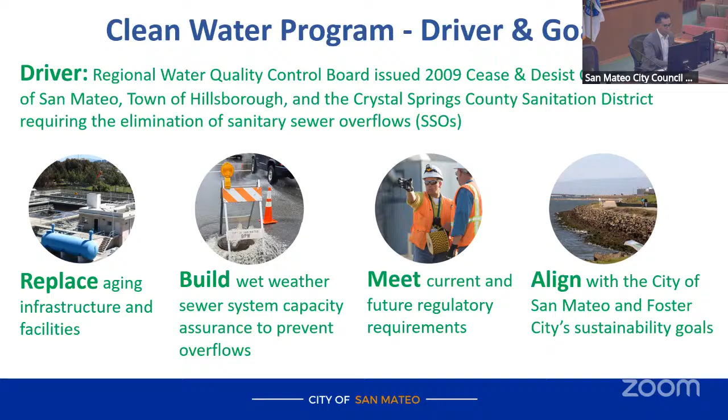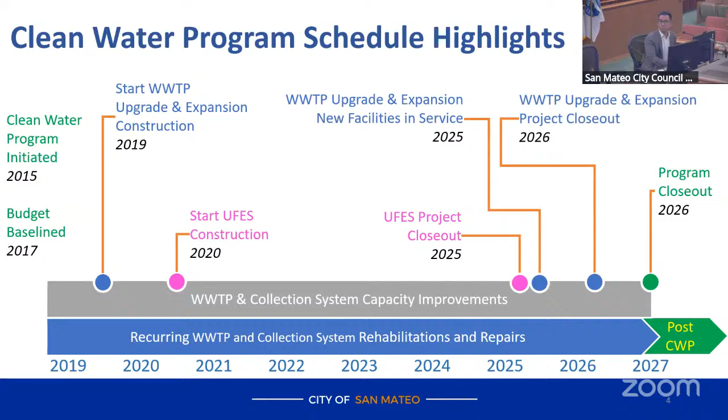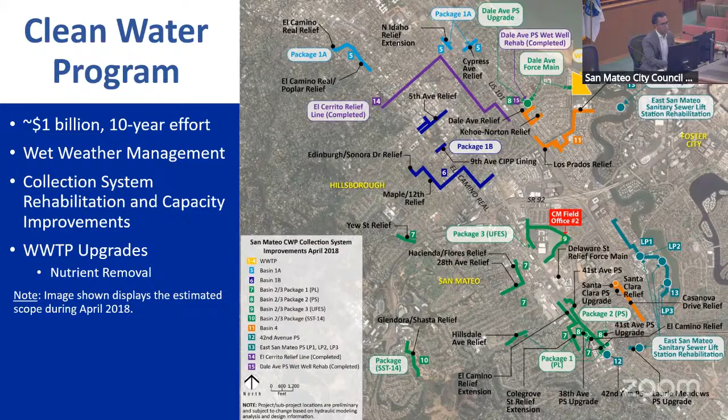The image to the right displays what the scope of the Clean Water Program was back in 2018. It displays various pipeline projects, pump station projects, and even our treatment plant projects shown there in the top right in yellow.

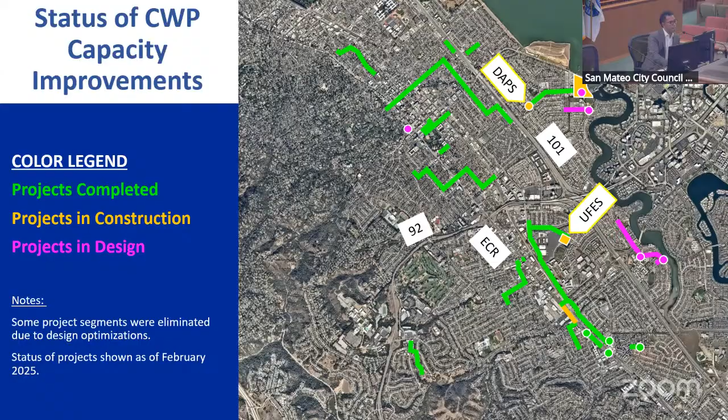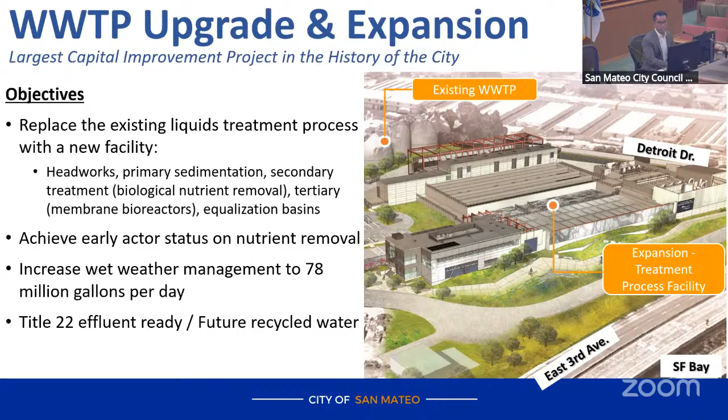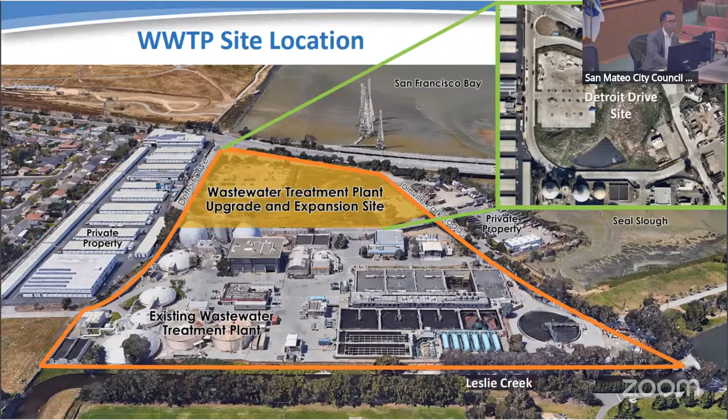I'm going to take you through a slideshow of construction. This is May 2020, back when we started excavation and shoring. A year later, we started doing piles and foundation, along with rebar and framework, that yellow arrow focuses on one of the piles. There are over 2,000 piles to secure the structure during seismic events, along with also preventing the structure from uplifting because there is a high groundwater table.

Moving forward into March 2023, you could see a lot more of the concrete process facility built. There is a unique stat that there is about 33,000 cubic yards of concrete, which is equivalent to 132 million pounds of concrete on this project. The facility also has backup generators, shown in the middle, to ensure that continuous power is provided during PG&E power outages.

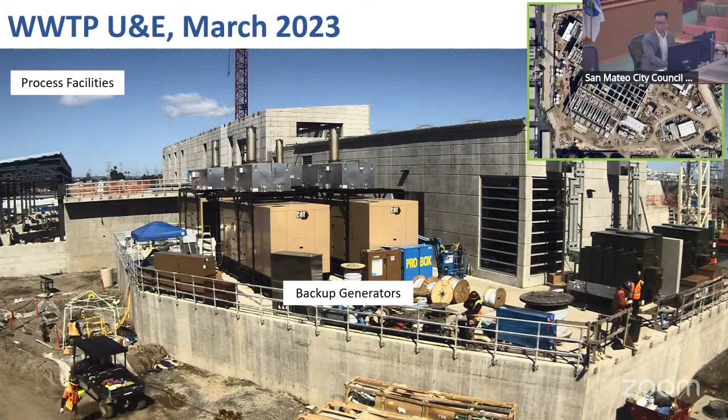Now I want to take you through the process that the wastewater will come in. It will first come in through the headworks, and this is a facility that removes large objects like rags, grit, and debris from entering further into the process facility. Our existing wastewater treatment plant does not have this type of facility, and so the treatment plant staff are excited to have this. After the headworks, it goes into the primary clarifiers, where further separation of solids and liquids occur.

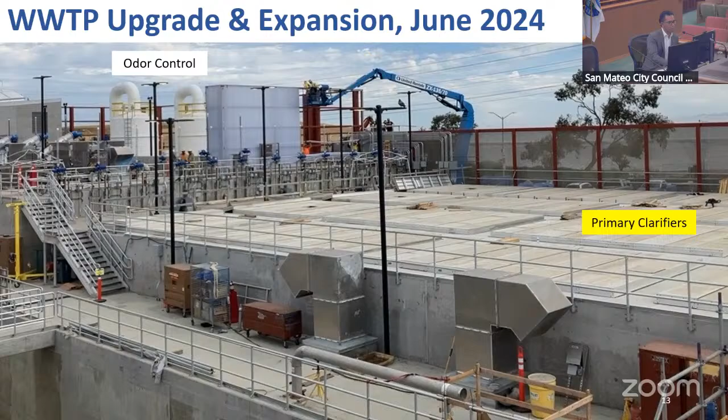Also in parallel to the primary clarifiers, there is a BioActiflo facility. This is to provide additional capacity during peak wet weather events to be able to meet our permit requirements. And this BioActiflo facility will be the largest in the United States.

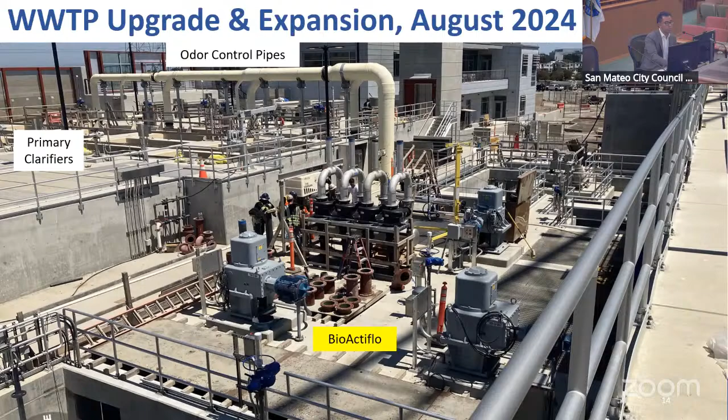After primary treatment, it goes into the biological nutrient removal system. The wastewater goes through this, which uses microorganisms to remove nitrogen and phosphorus, which are the nutrients that would have been sent to the bay.

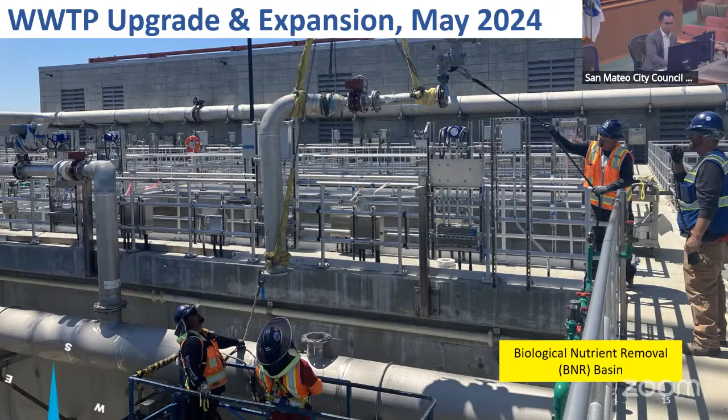And then lastly, it goes through the membrane bioreactor, or MBR, which uses biological treatment along with microfiltration to produce high quality effluent to meet the permit requirements, and that will allow us to meet the new regulatory requirements issued by the Water Board. This MBR facility is one of the largest in California as well.

After the wastewater gets processed through this facility, it then gets sent to the existing part of the wastewater facility, where it gets disinfected and then discharged to the San Francisco Bay.

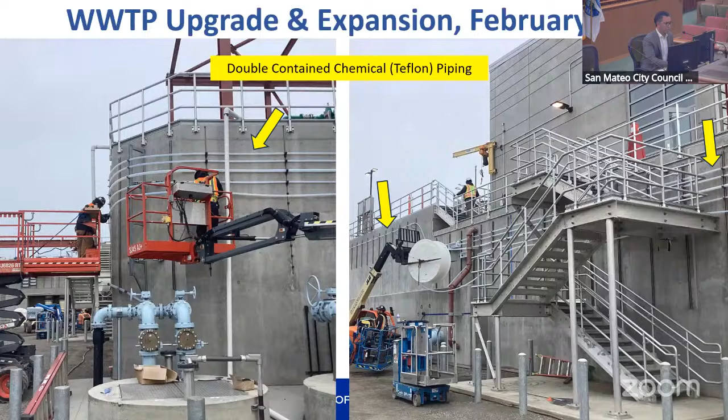Just a few other items here. This is the double contained chemical Teflon piping. This piping is meant to convey all the different types of chemicals to all the different processes that I just showed you earlier. There is a chemical storage facility where different chemicals get pumped, and this is the type of pipe that can sustain the thermal expansion within the environment there.

I also want to touch upon some of the public-facing components of this project. This is the eastern side of the new admin building that will house our wastewater treatment plant staff.

Going into the admin building, we have conference rooms and offices, but I wanted to bring focus to the laboratory here. This laboratory is one of the few that is accredited by the state of California. It gives us the capability to test the wastewater through each of the processes so operators know how to tweak and optimize the process better. Ultimately, this lab will test the wastewater before it discharges to the bay to make sure we meet the permit requirements. Many treatment facilities in the Bay Area do not have an accredited lab, so those facilities have to contract this type of service out. We are lucky enough to have this service and facility at our site.

This here is a photo along with a rendering of the pathway parallel to 3rd Avenue. To the left, it shows the pathway with rebar still being poured, and to the right shows a rendering of a bike path and pedestrian path. Those blue kiosks on either side of the path are informational kiosks to help explain what the wastewater treatment plant does. And then, of course, there are landscaping and architectural components, such as the blue artwork, along with screening on top of the frontage of the building.

This path is supposed to provide connectivity from the Shoreview neighborhood all the way towards Foster City, along with Joinville Park and Bayside School, and connect all the way to Seal Point Park, as well as the Bay Trail.

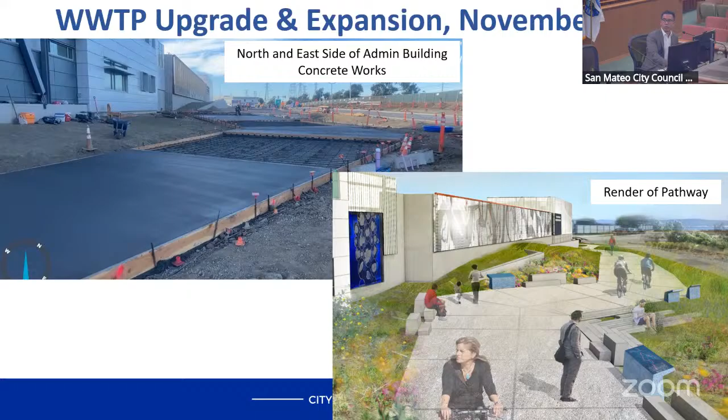Now, because of how intensive and challenging this is, there has been a significant amount of changes throughout the project, and there are still changes we are tracking, which are listed here. I'm not going to go through everything, but these are what we know now, along with potential risks and changes that may occur between today and completion. So the construction risks are listed there. We're estimating that we still need approximately 19.5 million in construction contingency, which we will be asking for later this year. On top of that, soft costs due to delays in project management, construction management, inspections, insurance, and engineering services are estimated to add an additional $5 million.

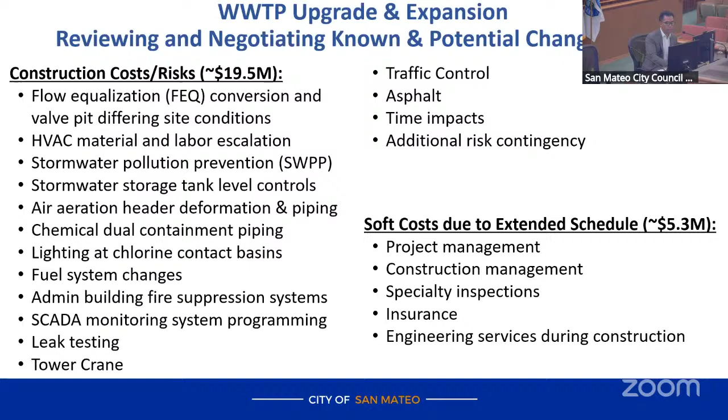Now, to finish out the project, there are still a few milestones. I'm not going to list out everything, but the first bolded item is clean water testing. We're starting that now through July, and we want to make sure that before we process wastewater through any of these facilities, we use clean water first. We then will have the new processes operational, hopefully by August 2025 according to our current schedule, and have a ribbon cutting in September 2025 so we could all celebrate this massive achievement.

There are some other components that still need to be improved on the existing treatment plant that will extend the project to closeout in March or April next calendar year. So this is a significant effort to close out this project.

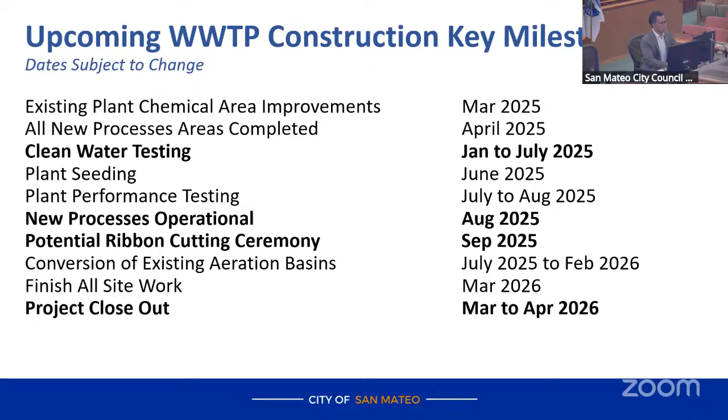This next chart is meant to showcase the producer price index of construction commodities over time, and this is to help explain why some of the costs overall for the program, along with any construction project that the city has moving forward, have been affected. The vertical axis to the left is the percent change, while the horizontal axis is time.

The various colored dashed lines are the various types of commodities. In the top there, we have conduits and fittings in yellow. We have copper and brass mill shapes in green, plastic pipe in blue, and I could name the rest of them, but you could probably read through them.

So I want to bring your focus to the solid vertical lines. In April 2020, Phase 3 of the project was essentially designed, and the contractor submitted bids for that cost. We went through the timeframe of April 2020 to October to value engineer this between the designers, the city, construction managers, along with the contractor to see how we could bring down the price. We brought down the price by approximately $30 million in value engineering.

And in October 2020, we awarded phase 3 of the contract for $380 million. After that, the contractor then had to get all the subcontracts into place, and then there were lead times to get all the different types of materials in.

And right now, there is a solid slanted green line there that is averaging about 70% increase for all these different commodities. So I just want to bring notice that it was a very good thing that the council was decisive in awarding this contract in October 2020, so that we could take advantage of all those prices at that time before the schedule impacts listed there, along with the cost impacts, were actualized.

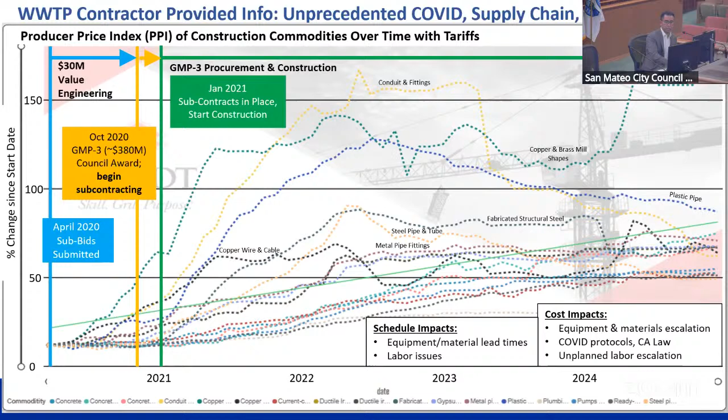And now a lot of our projects, along with the change orders associated with everything in the Clean Water Program and the city construction projects, all are impacted with increased costs.

This is a busy slide, but I want to walk you through this as well. To the left column, the first column is all the various different types of projects. The second column, in 2017, we baselined the program at $991 million at the bottom there.

Our current EAC, which is our current estimate at completion, this forecasts everything that we know, as well as some contingencies included, and that's about 1.028 billion. And then lastly is the variance of 37 million overall, or 3.8% difference.

So given that we have faced significant challenges with COVID and supply chain issues, rapid increase in inflation, I just want to showcase that, overall, this program, I feel, even though it is above budget, it still could be significantly worse.

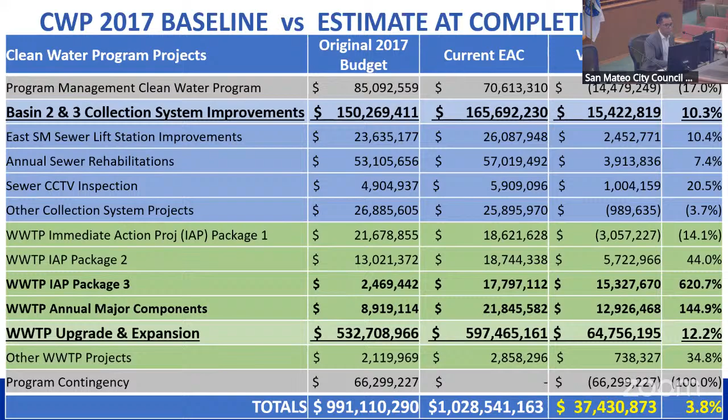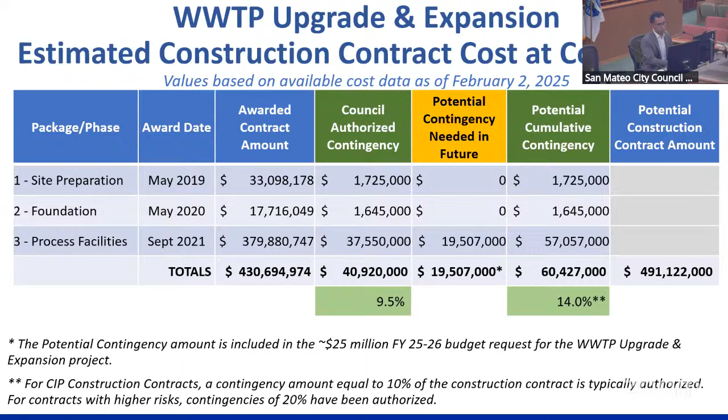And lastly, the last few slides have been showing costs increasing. And yes, the Clean Water Program is estimated to be 37 million, or 3.8% higher than our original baseline budget. And yes, we are anticipating to increase another 25 million for the upgrade and expansion project. However, I wanted to end this presentation with a slide because without these milestones and accomplishments throughout the program, the impact to ratepayers would have been significantly higher.

And so even though we raised rates, people were using less water, and so the revenues didn't increase. Because of that, in fiscal year 17-18, we had to raise rates 36% in order to gain the revenue needed to fund this program. And even that was not sufficient enough to go out to the bond market, to the loan market, and position ourselves to obtain loans.

And so in fiscal year 18-19 to 22-23, we established a 5-year rate increase, which increased rates 12 to 14% per year, along with restructured rates to have a 50% fixed fee rate component. So now, because of that fixed rate component, we had stable revenue. And within that 5-year time frame, we went to the bond market. We issued $270 million worth of bonds to kick off this project or this program.